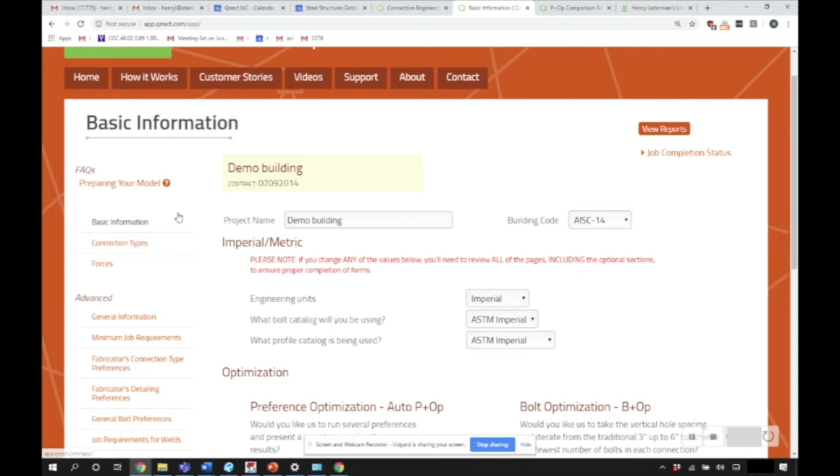Conflicts, coordination - to show you how, we'll start by bringing you to our website where we'll set up a job, the demo job. Here we have all of the general, very flexible preferences that one would need to develop the job standards, to engineer the connections, and to put them back into the model on any project. So minimum job requirements, etc. This gets filled out early, and once that's done, these parameters define the design of the joints for the life of the project.

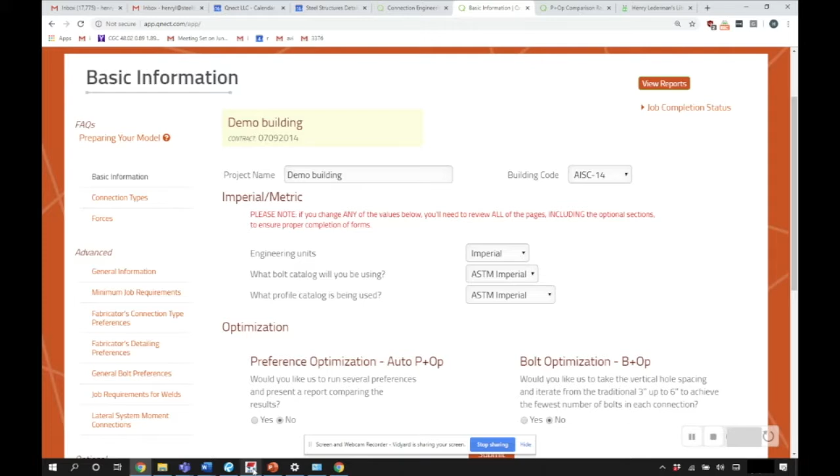So let me take you to a project. Once you set up on Tekla, this is working with a Tekla platform, you'll download our apps. You will see you'll start with a stick model - there's nothing in it. And we will select a joint, a floor, a sequence, the whole building, and we'll send it up to the website. We've already done this. We would, just to show you, we'll call it GC-1. We would submit, and I'll just show you what that would look like.

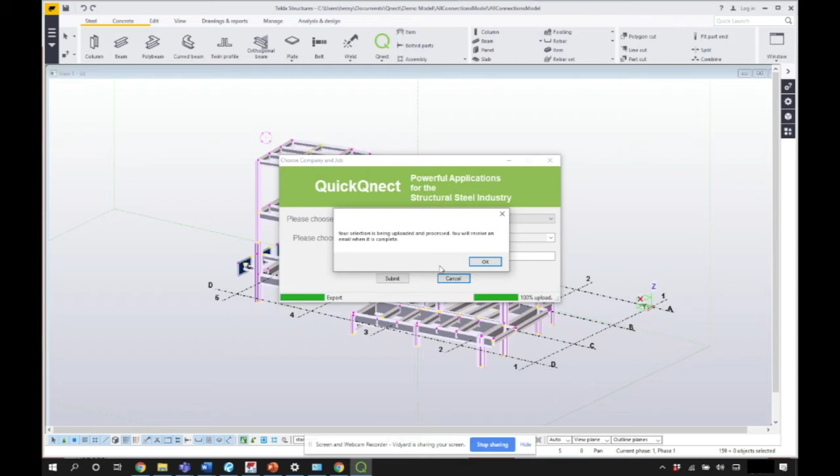We would submit, and Qnect is basically pulling out the data from the model - the profiles, the geometry, elevation, skews, any forces in the model - takes it up to the website, organizes it by beam to beam, beam to column flange, beam to column web, and returns it back down into the model, fully detailed, fully engineered. So let's return one that we did previously, for time reasons.

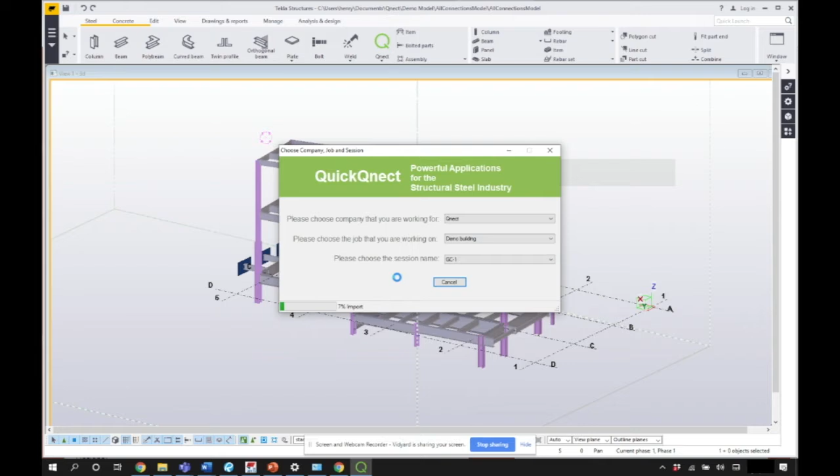Here we go, we'll submit. And now the connections are being pulled back down into the model. This is a 50-ton model, and you will see that it really doesn't matter whether it's 50 tons or 100,000 tons - Qnect is able to engineer and detail back into the model within the same day, so in minutes, hours, the same day, no matter the size.

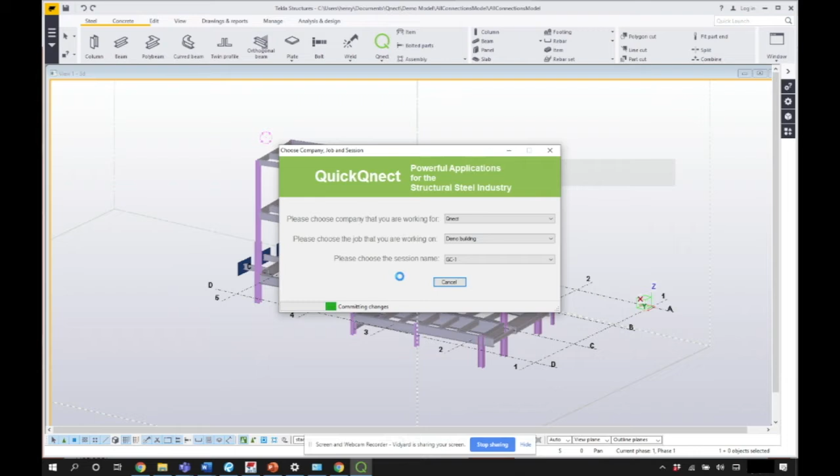We design every connection as a custom connection - that's what makes it so efficient. And we also detail it, which dramatically reduces the steel detailing time on the project. And so this is completed, as you can see.

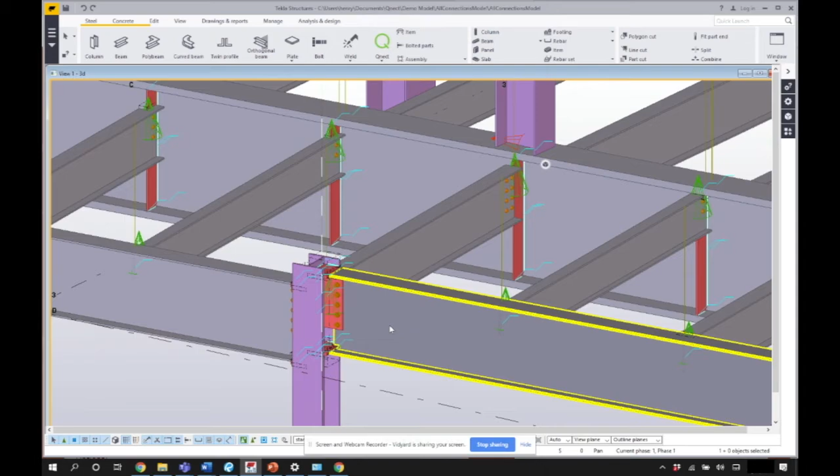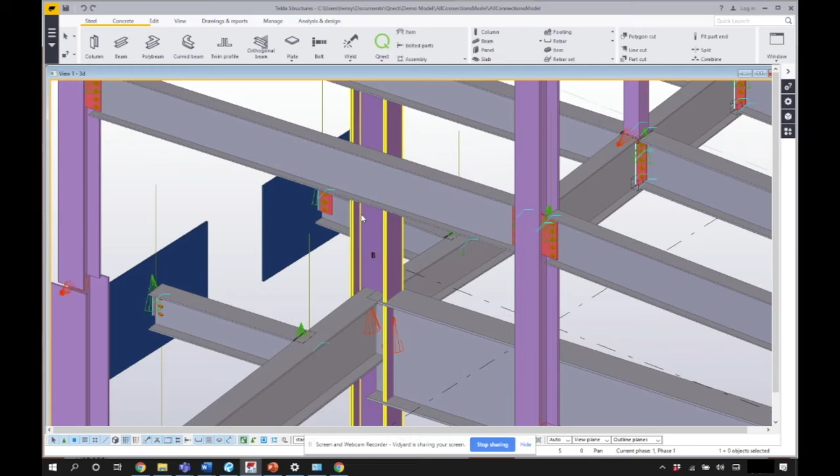The connections are in: double angle, shear plate. Here we have a moment connection, full pen weld. We also do top and bottom moment plates. You can see stabilizer plates with top and bottom stabilizers or without. Here's one with a stabilizer plate and connections to embed with plate washers.

So suffice to say for your purposes that the connections are done for about 60 to 80% on this 50-ton project, about 82%. It's fully engineered, and it only took about a minute and a half to do. A job this size would save the detailer about 4 days of time. So that in and of itself is pretty extraordinary, and we'll talk a little bit about that.

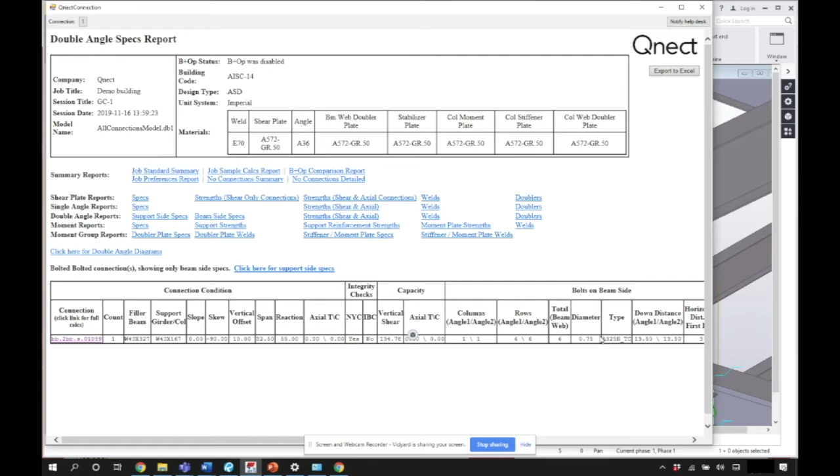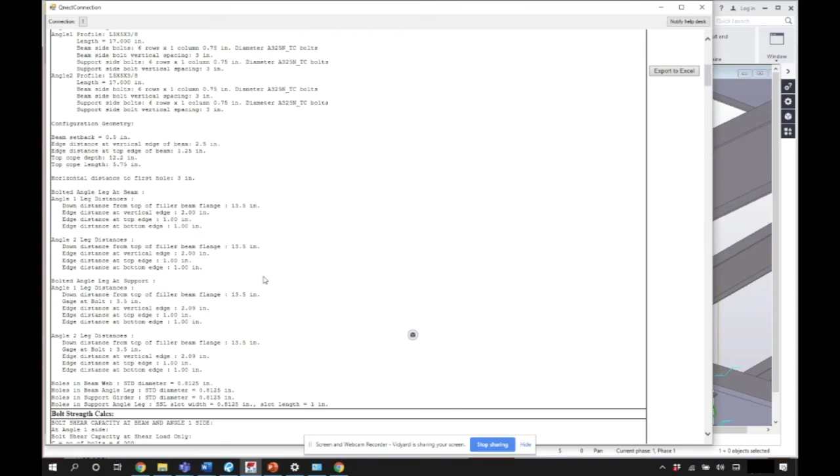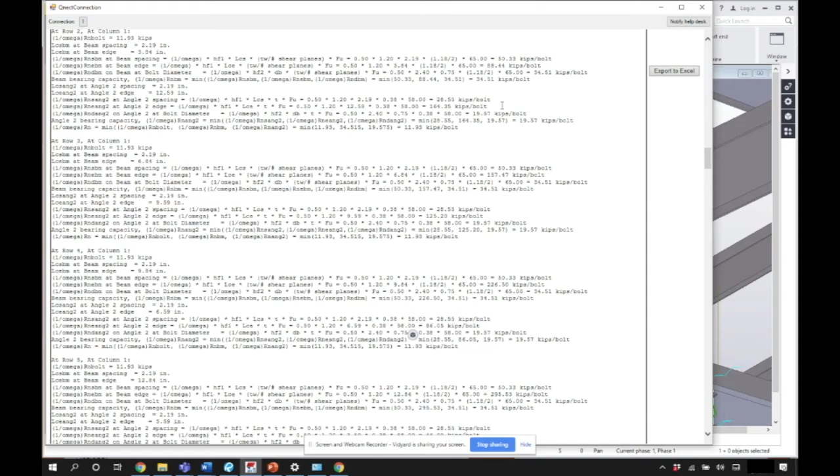But first, I just want to show you that at every single joint, all of the engineering is there - the size of bolt, the angle size, etc. And then if we go into the code, we'll see the full text, AISC, all of the limit states, and the full engineering that goes with it. We have been validated by many, many engineers of record and connection engineers, so our engineering is fully complete and accurate without a question about that.

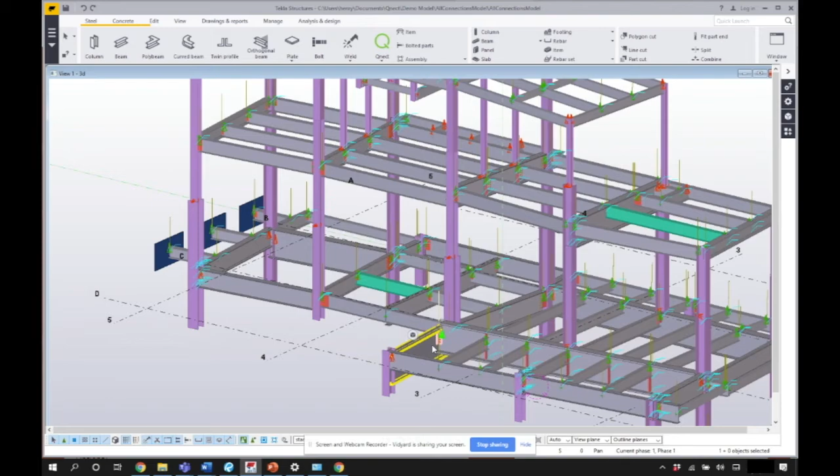All right, so that's the process. It's always the same: button 1, button 2, 60 to 80% of the connections fully engineered and detailed back into the model.

Let's talk about that, because we could stop the webinar right here. It defines the critical aspect of our delivery in terms of schedule.

As a matter of context, we did a 4,300-ton project where we engineered and connected about 65% of the building in 35 minutes. We saved about 6 weeks of net time, about 48 man-weeks reduction of detailing time alone. There are other ways we reduce time, but from a detailing standpoint, this context is important.

We're working on 3 60-story buildings in New York City. We did 15,000 joints, engineered and connected in 2.5 hours. 10 weeks saved, about 100 man-weeks reduction of detailing time alone.

The model will be engineered and connected for about 65 to 80%, and it will be done within 24 hours of the model being completed. Imagine your job and what that would mean to delivery of your steel, to have so much done on day one.

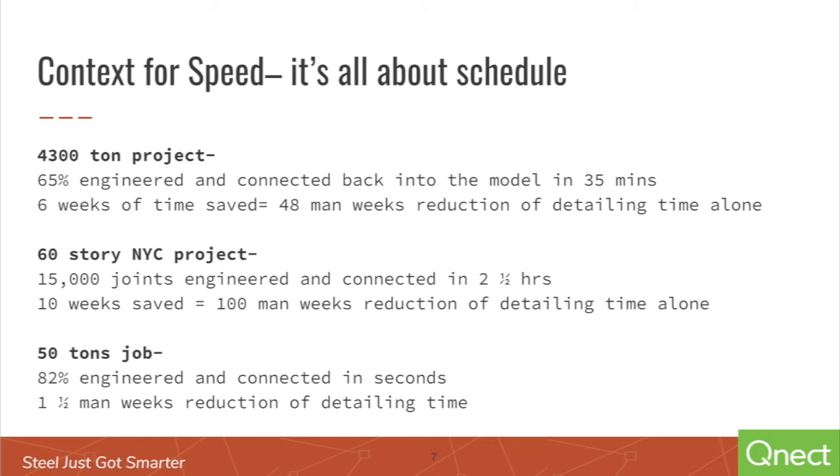But we don't stop there. Let me now show you another way that we prevent schedule drift, which has to do with revisions.

As we all know, jobs fall apart under the burden of RFIs, design changes, coordination, late coordination, clashes of different trades.

And so while we create this extraordinary amount of buffer time on the front end, we also contain schedule drift by the speed of revision.

So let's do a revision, and we'll go here. We'll say we change the beam size to a W40X331. We apply, we say okay. The minute we hit modify, our engineering tool comes up.

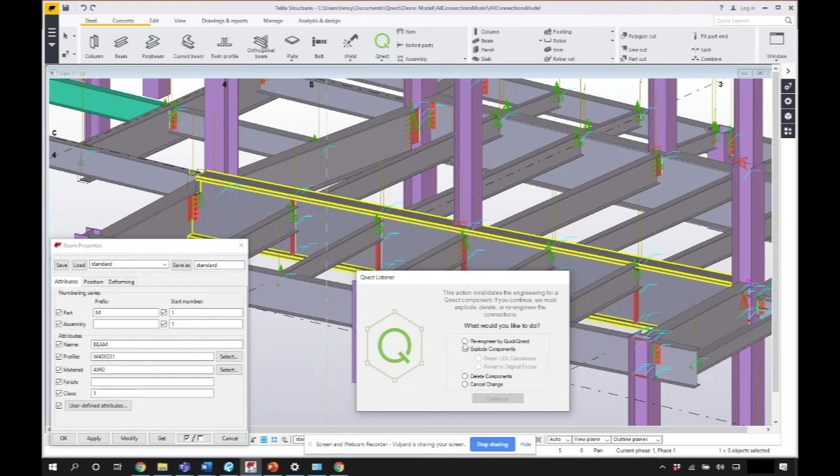We will re-engineer for this change. You'll notice that all the connections were pulled, and we'll call this GC, let's say RFI-1, because that's tracked. We will submit it up to the website.

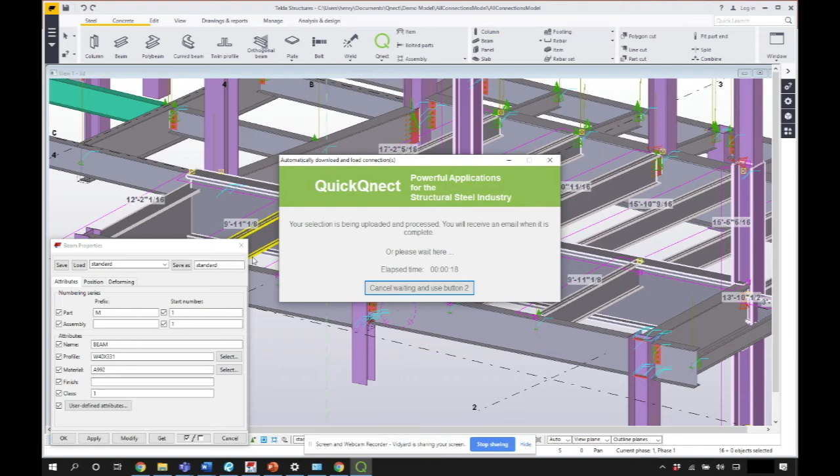And instead of hitting button 2 with revisions, it just comes back down automatically. So we're waiting for this to complete. Again, there are about 12 connections, and it took about 20 seconds.

And fully engineered. When you think about how the speed matters here, it's also important to understand the conventional methodology, where the GC hires a fabricator, fabricator hires a connection engineer and a detailer. The connection engineer produces the standards, gives it to the detailer.

Detailer has to interpret, puts it in the model. Then they have to check that it was interpreted right, put it back in the model, and it's quite a process. We integrate those two things in one step, extraordinarily fast.

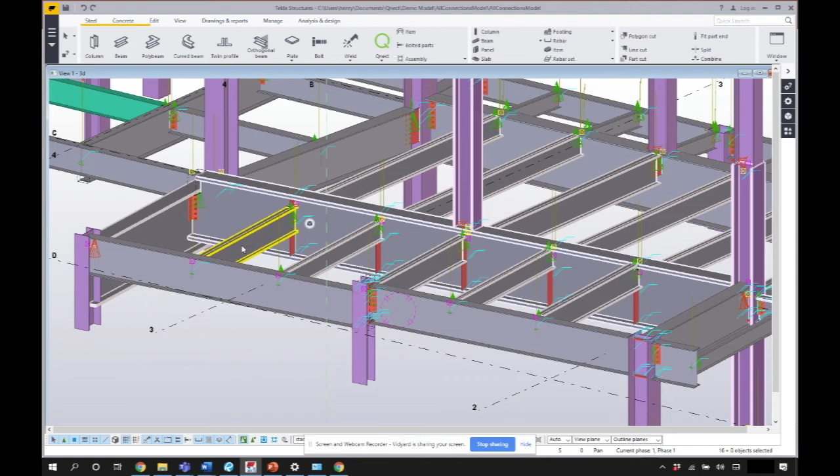We also carry the full connection engineering package, or contract, where our connection engineering partner will stamp our work, finish the non-standards that we didn't do in the conventional way, and stamp those, deliver a full package. So these two elements are the way we are able to produce so much time savings and prevent schedule drift.

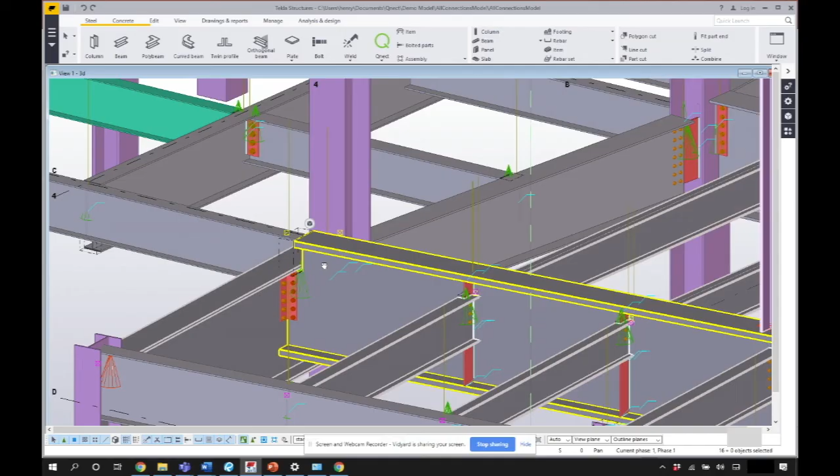And now I'd like to show you how we lower cost. And we're going to do that by activating our optimization tool. So to do that, we simply do bolt optimization.

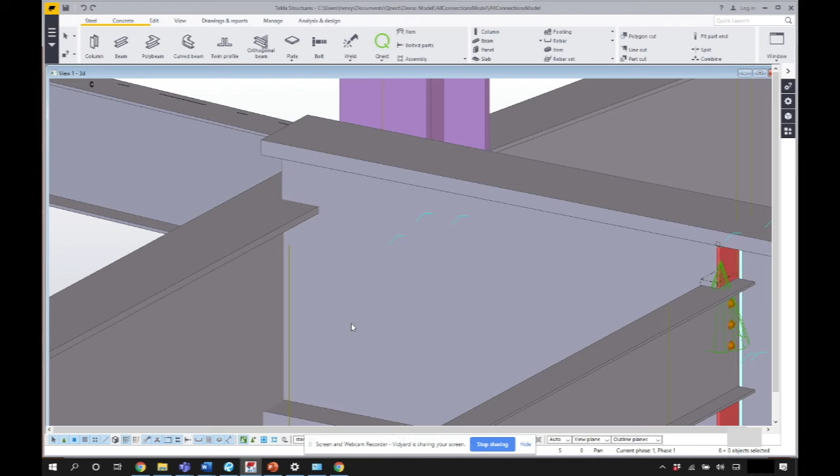And now we'll go back to the model. As you can see, there are 6 bolts here. What we're going to do is re-engineer this joint with the same loads. We're going to delete it, select the beams, and hit button 1.

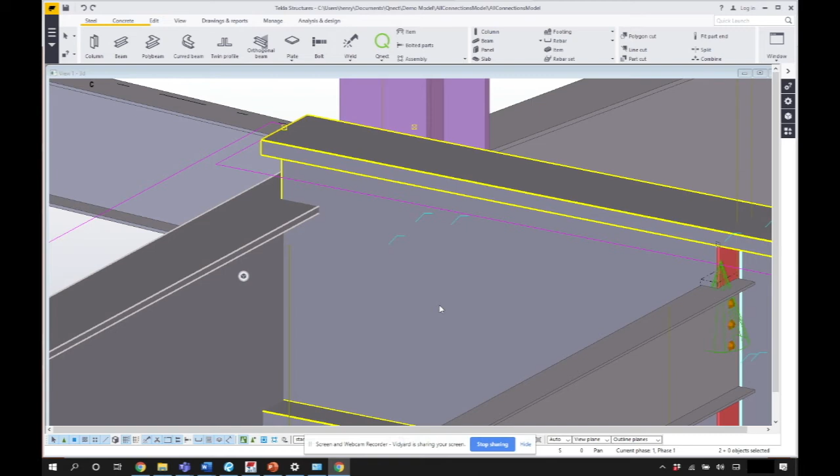We're going to do GC BUP-1, submit. And Qnect is right now engineering this connection and creating the component for the detailing aspect. Let's see, it should be ready already. And it is. So let's bring that back down.

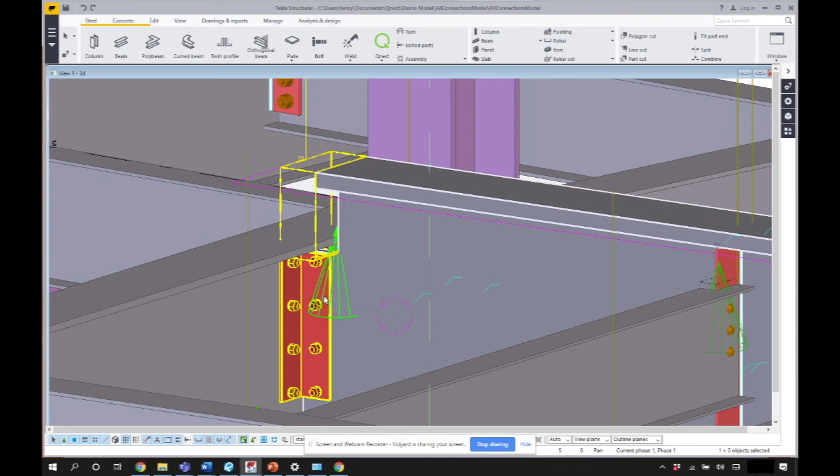We see that it has, in fact, as expected, engineered the joint with fewer bolts. We have 6 fewer bolts to buy, 2 fewer bolts to install in the shop, 4 fewer bolts to install in the field, and a total of 12 fewer holes to drill, cut, or punch.

And if you add that up for hundreds and thousands of joints, it really is consequential. As a quick measure, we typically save 1 to 1.5 bolts per ton in a project.

For example, we're doing an 18,000-ton project in Boston, and we're saving 22,000 bolts. That means 22,000 fewer bolts to erect and install in the field, which reduces time to erect, but it also means 44,000 fewer holes to cut, drill, or burn in the shop, which again means less time in fabrication.

And of course, we've just saved the purchase of 22,000 bolts. So that is our optimization feature of lowering cost while simultaneously adding to the time buffer, prevention of schedule drift, reduction of time to erection.

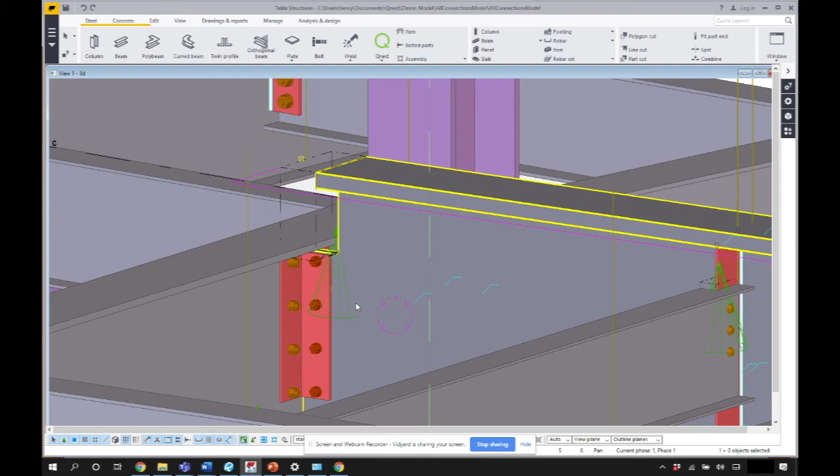That's optimization. All right, so now let's talk about a new delivery system, delivering a fully connected model. A good way to start this is with a quote from Tishman's senior VP in New York, Allan Paull. He says, when we convinced the owner to allow us to prepare a connected model prior to bid, we picked up 3 to 4 months.

What is a connected model? A connected model is a stick model, as we saw at the beginning, that has all of the connections in it, and only the connections, for all the main steel, fully engineered, approved, and turned over to the fabricator. It can be utilized during the bidding stage or transferred after. Qnect is the infrastructure for this kind of delivery.

We're being used, for example, on a 60-story building in New York City. They're up to the 40th floor, and the job hasn't even been bid yet. So if you think about it, if you start the detailing 4, 6, 8 weeks prior to the bid, and the bid takes another 8 weeks, you're already 16 weeks ahead of time. When you add the speed of Qnect, it starts to be truly meaningful.

AISC is certainly a big proponent of us, and they understand and talk about us being part of the delivery of their initiative to reduce steel to erection time by 50% by 2025.